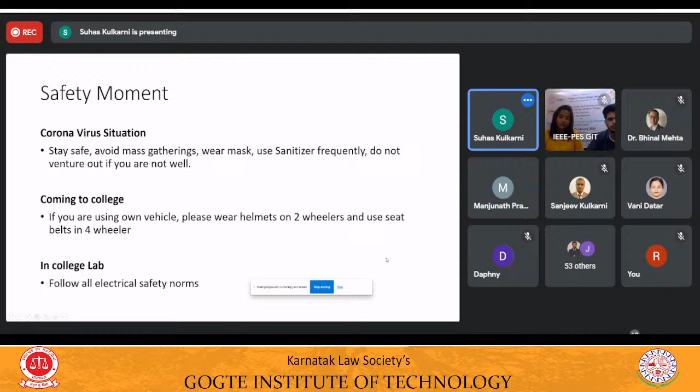So what I'm going to cover today in this discussion: we will talk about what is an asset in industrial operations. We'll talk about that. Then, what is asset performance management? What is the big deal about this? Why are we talking about all this? Some of the figures that you're going to look at.

I'm audible, right? I hope. Yes sir, you're audible. Okay, sorry, I'll keep checking in between because sometimes it so happens that you are lost and then you keep talking.

Okay, thanks. So then we talk about the different operations and maintenance strategies currently followed for assets. We'll try to compare with how we generally do car maintenance, kind of doing an analogy so you understand what these are.

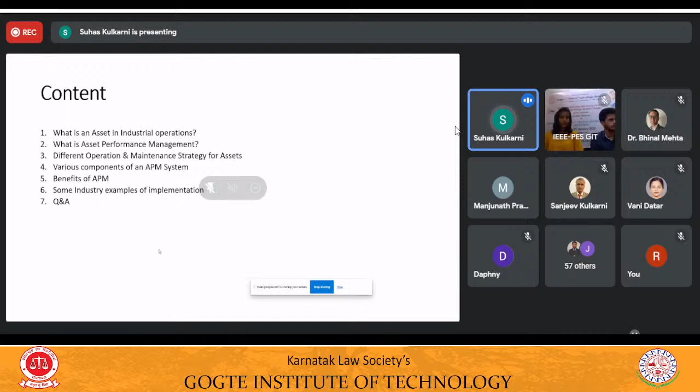Then we talk about some things - I'm not going to talk in depth about every component of performance management, but we'll discuss a couple of things. One is condition based monitoring - how do you look at the condition of a particular equipment, and based on that decide when you should take it for maintenance and do the related activities.

Second could be predictive maintenance. Of course it partly derives from the condition, but it also uses the models we're talking about. A lot of things don't work with standard physics-based rules - a standard physics-based rule would say okay, this happens and this happens, very logical. But today, with so much data available to us, and the computational power we've got, we found that a lot of seemingly unrelated data are actually related.

When you use artificial intelligence or machine learning models for this, you're able to connect a lot of data and derive meaningful insight out of it, and that actually helps predict when failure can happen. Based on multiple instances, you are able to teach the models - okay, when it last failed, this is what happened. Obviously, when we talk about a motor, there is a bearing failure, or vibration is increased.

It's a very clear case that the bearing is not right, so time to change the bearing. But that's something that can be easily inferred. Some things, when you're looking at complex systems, could just be a small blockage in the air pressure filter of a system, and that could lead to multiple actions, and over a period of time it fails. So when is the right time where you're able to identify what has really gone wrong, and what could really go wrong?

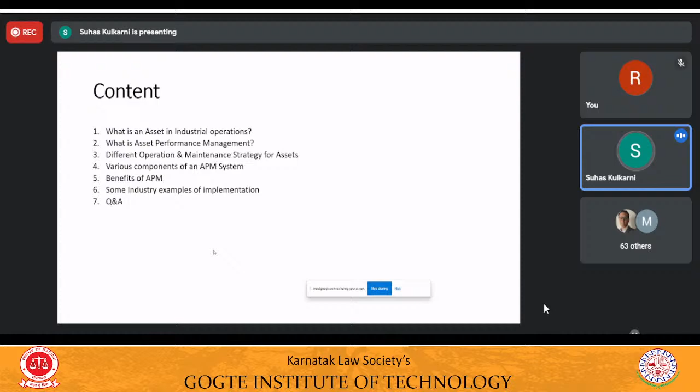Let's try to understand what's an asset. Now what's an asset? An asset is something that's of value that can be converted into cash, and that is what typically, if you go to a bank, they talk about assets like that. Whatever can be monetized becomes an asset. So everybody owns assets — some of us have a car, a bike, a house, or land. Everything is an asset, and all this can be converted into cash. So that is what we talk about.

But for a company, of course, it also has assets like this. A company will have a building, cash, equipment, and all those things. So primarily we could divide them into three types: one is physical, that which can be seen physically; second is human assets, the people that are around — people are assets; and then the third could be virtual, one that is not seen or felt, like IP rights — intellectual property and those things become the virtual asset. So that is what an asset actually is.

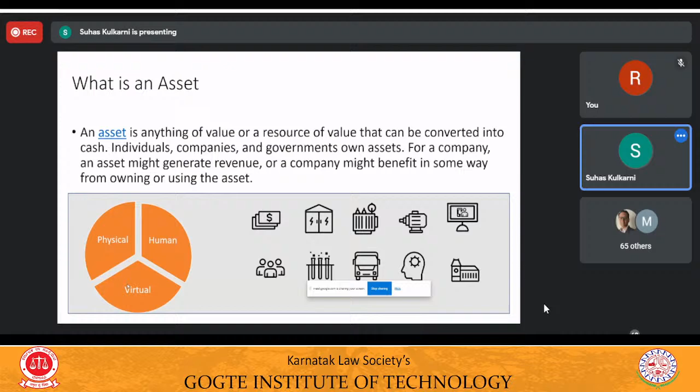Now what is of interest to us when we talk about asset performance management is — before that — especially when I talk about an asset used for production, what's the typical life cycle of an asset? Let's say you want a motor for a hoist, so you plan — you need a hoist, you have a hoist application, and the hoist will be run. A prime mover for the hoist will be a motor, so you plan for it, design the hoist, design the motor, and then go on to procure — who are the vendors who supply the hoist — and you procure, then install it, then commission. Once the hoist is commissioned, it's up and running, then you run, operate, perform, monitor.

Over a period of time, you feel, no, this isn't enough. You started with, just as an example, a DOL, direct online starting, and then you realize, no, this is not good.

I need better control, better energy efficiency, so why don't I apply a drive for it? You modify, you put an AC or DC drive onto it to make it more smooth, energy efficient, and all that. Then you run it for whatever time you need. Tomorrow there is a life for that, and when that life gets over, you discard it - either you replace it by disposing it off, or you decommission it and remove it from service. So that is how typically an asset life cycle works.

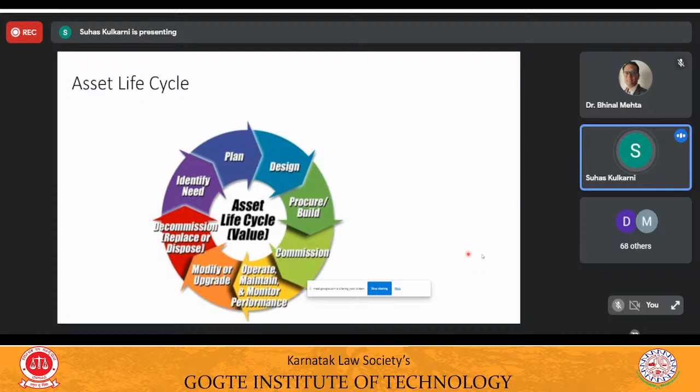But then we have the electrical, the rotary ones. The rotary ones are something that move a lot, and they are really prone to failure. These become utmost important, because once anything is moving over a period of time, there is going to be wear and tear, and when there is wear and tear, there is going to be a failure at some point of time, and so then they need maintenance. That is the rotary part of it.

Then we have electrical assets, which again could be, some of them could be rotary. If you look at the electric generator in this case, or there are switch gears and circuit breakers that will also have some moving parts and all that. But by and large, most of them are static. But again, because of the current, heat, and all those things, there are failures on account of that. So exposure to the load cycle, how it's loaded when going to the peak and all that - that's what causes the failure of some of the electrical equipment.

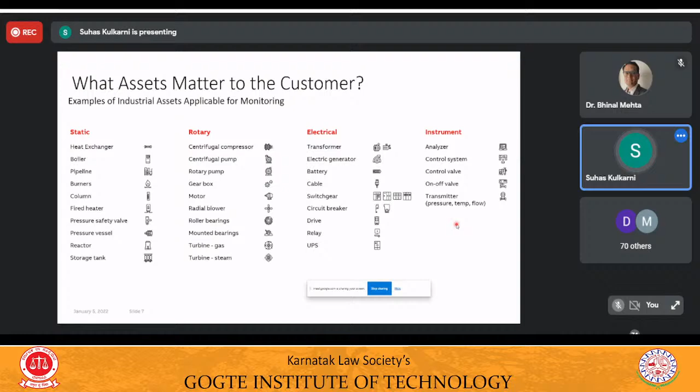That means any equipment that we were talking about in the previous screens should be working reliably. That means, let's say a transformer has to deliver, is rated for a particular kVA, and it should be working in that range. So it should be working in the rated range reliably. You should not have dips, it should not overheat, it should not fail, it should not have a shutdown. That is what is reliability.

Then the second part is availability. That means, as I said, many of these equipment need to be working 24/7, so they have to also be available 24/7. You can't switch it on and switch it off and then use it as and when you need. These equipment should be working reliably, and their availability should be very high. That is what is asset performance.

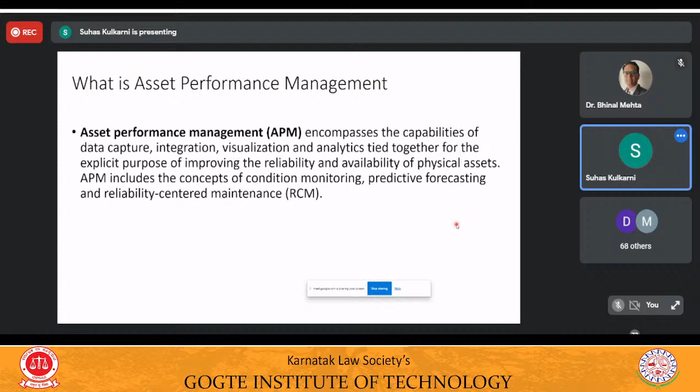Similarly, predictive forecasting is looking again at the conditions, modeling it, and then trying to forecast based on the multiple inputs that are there around it. We're able to forecast when the equipment can fail and what's the optimal time to get that repaired, so that you prolong it and don't need to do maintenance every now and then, because in that process you actually increase the cost. So we will look at some of the maintenance practices so that you will appreciate what I'm talking about.

Okay, so you see these figures, and this is talking about an oil and gas customer. In this case, 70% of the decisions, they are not aware when exactly it is due for maintenance. That means I just take a gut feeling and say, okay, I've run the motor for, maybe giving a number, 100 hours, so X number of hours, and I need to take it for maintenance. Is that the right time? Because the moment you take it for maintenance, especially motors and transformers, you need to shut it down, and the production is down, right?

So is that the right time? Could this be prolonged? Let's say, as per the running rate, it comes to a peak time, just before Diwali, when you have huge demand for your products, and then it comes for maintenance just before that. That would mean you would not be able to do your Diwali deliveries. So could I make sure, by any means, that no, I don't need maintenance right now? I can take it during Diwali, when production is relatively less and everybody is on holiday. I've already produced and sent, and that's the time I could do it. Can I prolong my maintenance, because as per theory it is due now? That is what asset performance helps you do.

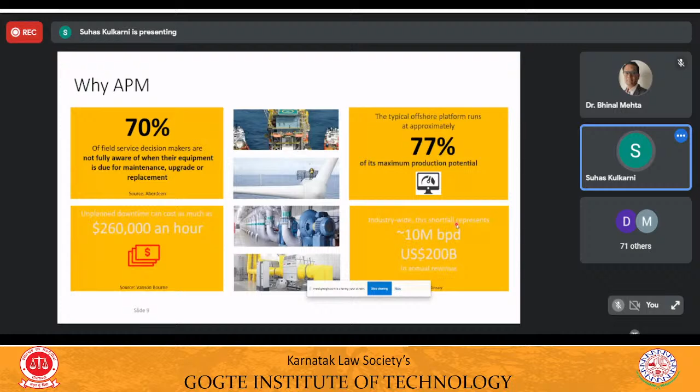What are the challenges or the market drivers that are there? One is today we are having less and less resources. Especially in a country like India, there's a lot of experience that is not there. People have retired. Younger generation does not want to do the maintenance kind of jobs. So we're having really unskilled people working in that particular sector.

Then there is market pressure for higher production and all that. Then there is margin pressure that I was talking about, where we need to make more and more out of less and less. Then there are old equipment - equipment that has got old, but I don't have money, and neither the time nor the resource to replace it. So that's another part. So what do I do then?

I look at enhancing the life of a particular equipment. That is where assets are becoming very complex today, because today's assets are becoming much smarter. They are able to give a lot of information about themselves. So that also helps in making the most out of the information that is coming out of these things.

These are things that are really challenging us, and as one of the surveys shows, we can definitely increase - companies are losing production because of unplanned downtime. And that's huge, right? If you're losing 5% of your production time because of unplanned downtime, and if you are able to set right even 50% of it, you're straight away increasing your profitability by 2.5-3%.

Okay, let's get a little bit more technical now as to how actually this is - is it clear, or is it too small for you to look at the screen? A bit small, sir, but we can see, sir. It's visible. Okay, right.

Generally, if you look at how traditionally people have been maintaining - if you look long time back before processes were set, it was a very reactive kind of thing: see something fails, you go and fix it. That's what we do in your house, right? You don't replace a bulb before it goes off. When the bulb fuses or it does not work, you find a new bulb and fix it. That is typically what is done, and it's not that important - you can always live without light for a couple of hours, and then bring a new one and fix it. That's what we call reactive maintenance.

Now, there is something that could be called preventive maintenance. What do you do? You do it before anything else has happened. Like changing the engine oil of your vehicle - after you run a couple of hundreds or thousands of kilometers, you go to a mechanic and say, sir, this has now been running for this, so you better change it. So that will ensure the engine remains healthy. So that's preventive maintenance.

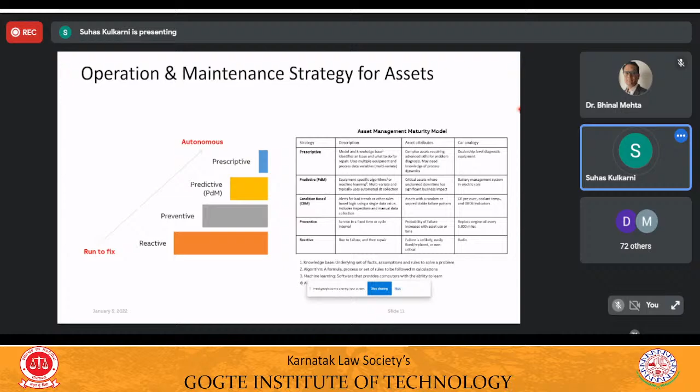Great, sir. Yeah, thanks. So, okay, so now we look at what is condition-based maintenance. Now I just put across some of the curves. You can look at this, this is the maintenance based on the asset condition. The asset condition is monitored. Now, how do you monitor the asset condition?

Asset conditions can be monitored using multiple sensors. Now you have smart sensors today available, I'm going to talk about some of them. One typical use case I will look at is how we do predictive maintenance for a generator, how it is done, what are the various steps and all that, and that's what you will look at in the subsequent presentation.

So there are these sensors which tell you a lot about what's happening to the machine and about the condition of the machine, and based on that, with certain logic and models, you are able to tell, yes, this is where it is. And if you look at the costs initially, if you do a planned maintenance, the costs are very high.

Because the costs are high, the repair costs are low. The red one, if you see here, are low when you are doing it in a planned way, because the machine is fine. But look at the prevention cost, it's very high, because you're taking a downtime of the particular equipment. Your production is stopped here in this case. So if you add the production value, that is where the cost is really very high.

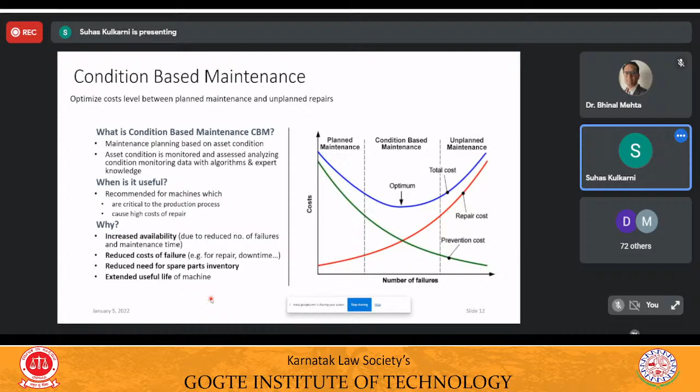Now, when can failures be detected or predicted? If you look at the condition of a particular machine, some of the signs can be seen as early as one year before failure, because you can know that certain things have changed. Many of these are rotating machines, and we're able to get a lot of information.

Let's look at the bearing. What happens when the bearing wears out, or starts wearing out? It's not completely worn out, but starts wearing out, and your vibration on the axial axis will increase. So you can see axial vibration coming up because of this, and you can detect that. That's when something is going to happen. As the wear increases, your vibrations keep increasing, and at some point it is going to fail. Now, when should you do this kind of maintenance?

This is what you do: a prediction of the failure. Based on the models, and if instrumentation is available, we can create a digital twin of the particular asset to really know the condition, and then find out when I could do the maintenance, probably when the cost is less. That is what will be determined by the customer or the production in-charge, because he or she knows when is the right time, the lean period, to take a shutdown and do this kind of maintenance.

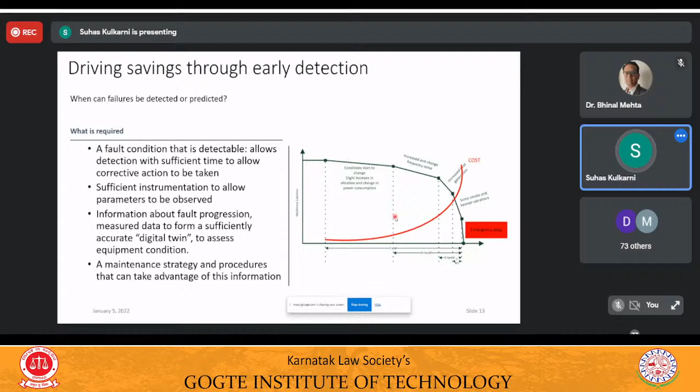So you understand how condition-based monitoring is helping us take advantage of extending the life cycle of an asset. So how does this work actually? Condition monitoring for an electrical equipment.

Let's look at an electrical equipment. A motor will have, as I said, a temperature - it could be a winding temperature, or a bearing temperature. It could be a vibration sensor near the bearings. It could be a current monitor to measure the harmonics and all that. Or it could be a moisture sensor - moisture can be a big hazard in industry.

So if you have moisture sensors, all these signals are able to tell you - just a minute - okay, so these sensors are able to tell you what is the actual condition of the equipment.

Now, then you build monitors - you build a kind of model that's going to realize what is happening to the conditions, which actually estimates what is happening. So in the software, or the system we're talking about in asset performance management, it takes the signals, analyzes them, runs a model, and then gives the actual condition. Once the condition is given, it's up to the operations or maintenance in-charge to decide what would be the right time to do this.

So how is it typically done? I'm just putting a very broad architecture what you can look at here.

Okay, so today if you look at multiple equipment that are there in the field, it could be a drive, a motor control, transformers, and all these things, so they are all connected, and all the information is coming to the asset performance management platform. This is a software platform which uses technologies like IoT to get data into this, and then each of these is modeled.

Each equipment that is giving information has a model, very similar to a digital twin, and there you have the inferences from the multiple inputs that you got to decide what's happening to the particular equipment, when does it need maintenance and all that.

The cloud computing gives a lot of flexibility in terms of the models that could be developed. So there could be a lot of models already developed for various equipment, and today you may have only X number of equipment, and tomorrow you add a different Y equipment or a Z equipment into this, and all you need to do is go to the cloud, look at what is the model available in the library for the new equipment added, just add it, and then you have a platform giving all the information to a maintenance manager to take informed decisions on when to really take an equipment for maintenance, what's the condition, what needs to be done, and all that.

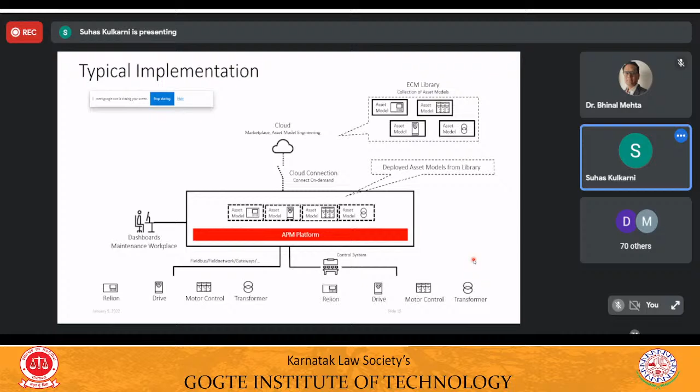Okay, so now let's look at predictive maintenance. Okay, so mainly it's what we talk about.

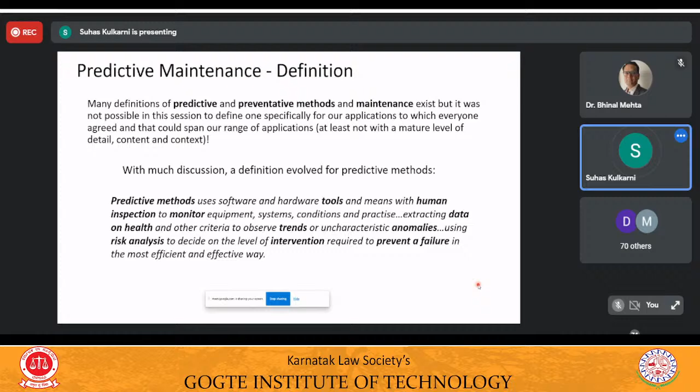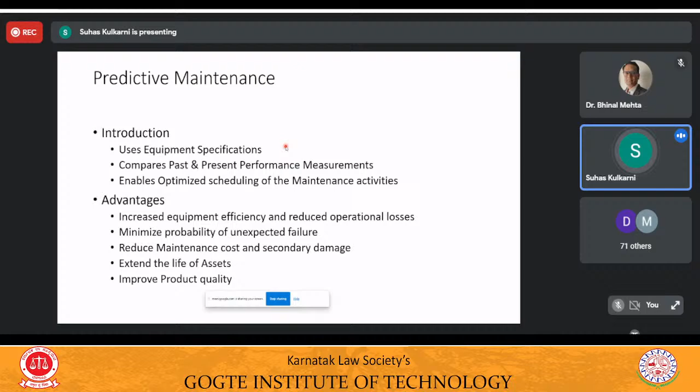So that makes it very important that we are able to really use predictive maintenance to the maximum. This also improves things because you are maintaining well ahead of time. It also helps you extend the life of the assets, and because you are able to run it in a much better way, you are also improving the overall product quality. So these are some of the advantages that come out of going for predictive maintenance.

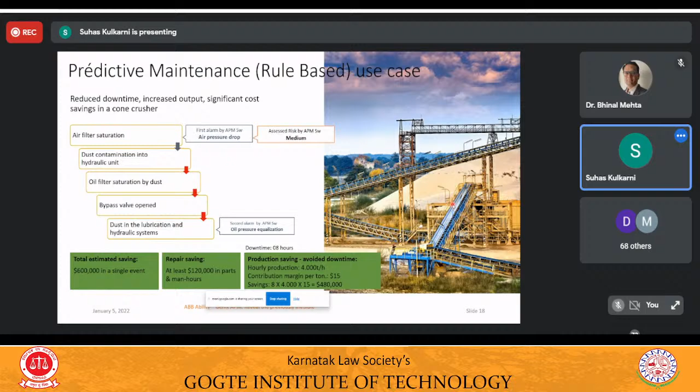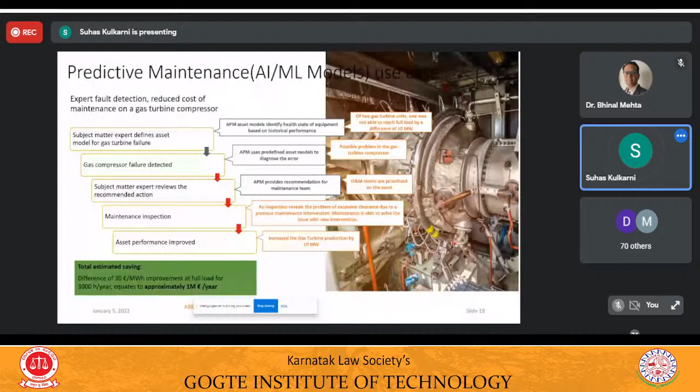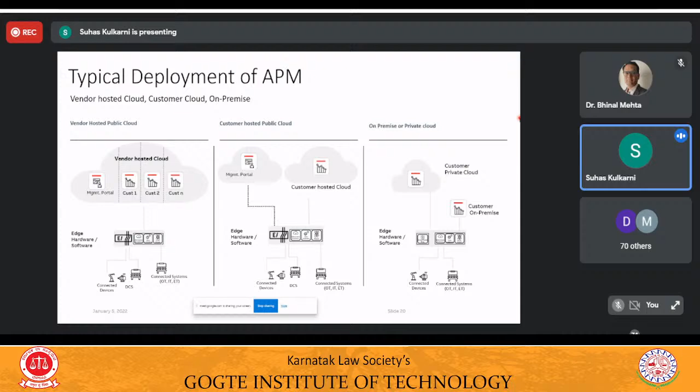Now, how is this? As I said, we are doing this for multiple customers. How is it impacting them?

So we've done the project for an oil and gas major where the real-time data is available on ABB Cloud. This is what I was talking about, and we are giving them inferences on their platform as to what is happening and what they need to do, which is helping them extend their asset lifetime and increase their operational capacity.

Similarly, we are doing it for another energy major, and we are giving them data that is enabling them to take operational decisions. We're doing it for a gas distribution agency on how the data is moving. We're doing it for a water distribution company, again with data coming onto their cloud or our cloud, and we're able to tell where the leakages are, what they need to do, and how overall their energy efficiency can be increased, and so on.

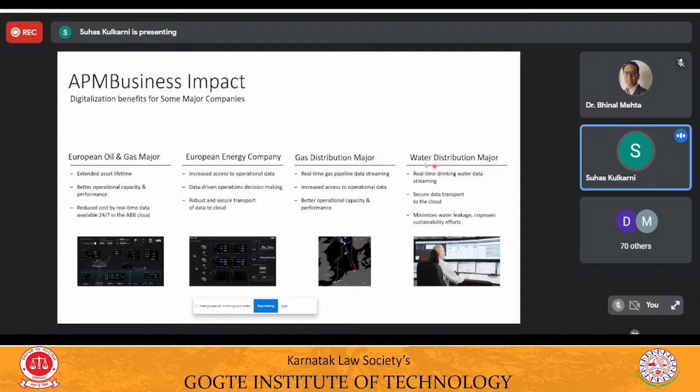So these are okay. Now, as I said, we will briefly look at how we typically carry out predictive maintenance of a generator. This is an ABB example with some of the ABB products and solutions. I have not named any of them explicitly, but this could vary a little from company to company. So what I have done is based on what I have seen, please be aware of that. In case you find it a little different, this could be an architectural or philosophy difference between the various companies, because there are similar companies to ABB who offer different solutions.

But I have tried to make it very general. Please forgive me if you find it very specific and different from what you've heard elsewhere, that could be a difference in architecture. Okay, so let's look at a particular generator.

So why do we need an optimized maintenance plan? As I said, you need an optimized plan because you want to take maintenance when it is really required. And how can you give an optimized maintenance plan? It could be by physical inspection, which includes an air gap inspection - the air gap between the stator and the rotor, that could be looked at.

MACHsense is a smart sensor by ABB, and it can sense a lot of information about the motor and its condition. We will see that in the subsequent slides. Then we can do a life expectancy analysis of the particular motor - how long it can run, what condition it's in - and do an actual survey of the site, then discuss with the customer on the maintenance schedule and how it is going to work.

All these put together, we can really come up with a maintenance plan wherein the customer can extend the maintenance period, or rather delay the maintenance, to get the maximum out of the machine and have the minimum cost of maintenance.

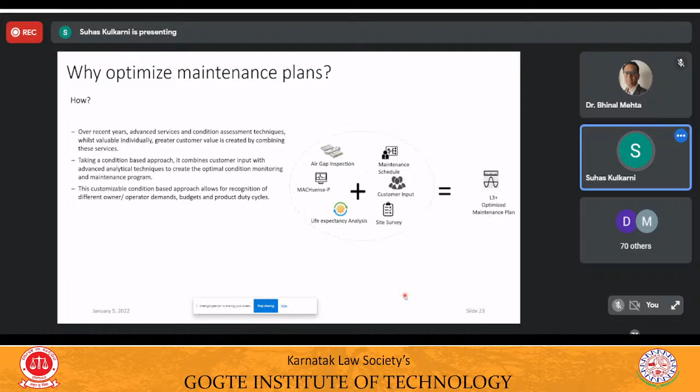So we use the condition-based approach, and we use both non-invasive monitoring process. That means we really don't need to take out anything, but at some point of time, for some of these things, we could also need some invasive method. But again, these are all minimal invasive methods, so you really don't need to take out the whole motor and then do the inspection, but it could be something that needs to be done.

So again, finally, the idea is to increase the availability, bring down the risks of any unplanned shutdowns and unexpected failures, and maximize the uptime, ensuring that the maintenance planning is done properly.

One is, we could delay, but then if that leads to unreliable operation, that is also not something we want. So it has to be reliable, and it has to be also prolonged. So that is where we are kind of working on an optimized maintenance plan.

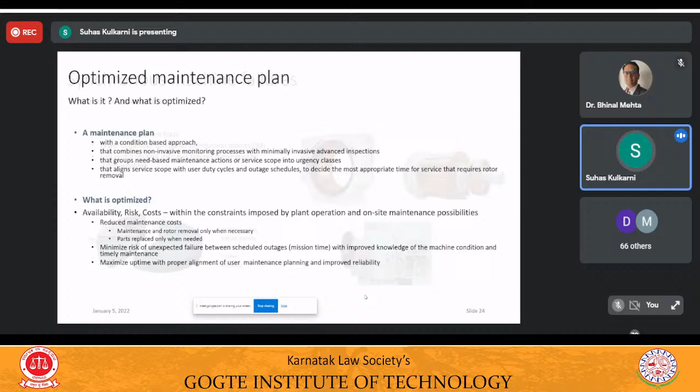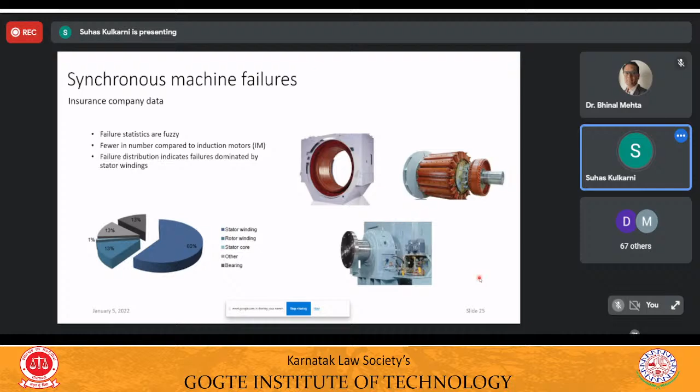Now, what are the root causes for the generator stator failure? Again, the biggest root cause is where the electrical insulation actually fails. And sometimes it's a mechanical failure, sometimes it could be thermal, and sometimes it could be bearing failure. But majority of the time, it is the electrical insulation. Now, why does the electrical insulation fail?

Again, if you look at that, it's the aging. It has aged, gone through multiple cycles of heating, cooling, and all that, and it's been used for quite some time. That could be one reason, or it could be contamination, internal partial discharges, loosening, thermal cycling or overloading, or defective corona protecting. So these are some of the major causes for insulation failure in a particular machine.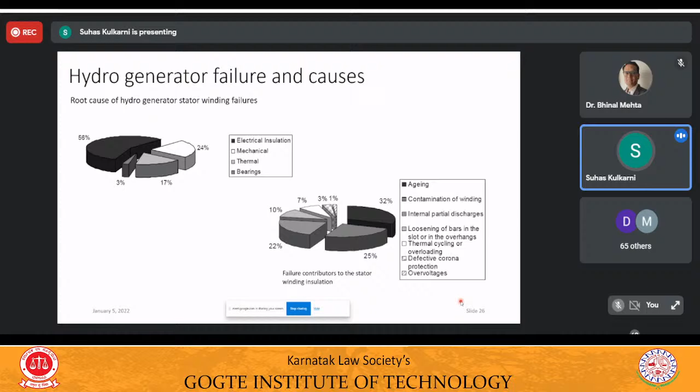So this is how we arrive at how and what is really happening, and then we work on that, and then we do a life expectancy analysis — why is the most critical failure, what is the condition assessment, what is the expected lifetime, what are the recommendations for maintenance action. So all these are presented to the customer, and how the downtime can be reduced.

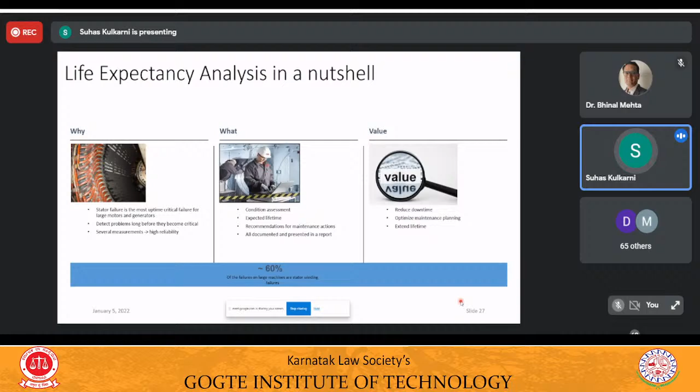So, as I said, using the smart sensors, we are able to get a lot of things — one is the load, torque, temperature, FEM model for fault detection, flux force, speed, torque — all these are captured by the smart sensor, and it's available through our own dedicated software, and these are available for everyone.

So today's world, almost all vendors have got this kind of thing that are used for defect detection, and are able to give what's happening — whether it's an interturn defect, or rectifier defect in case of rotors, or sleeve bearings if there is excessive or unequal clearance.

Similarly, in case of stator, is it the core looseness, or the supply quality? We also check the supply quality in terms of harmonic distortion, supply unbalance, over voltage, under voltage, or frequency changes, and all those things. So the smart sensor is able to give a lot of this information.

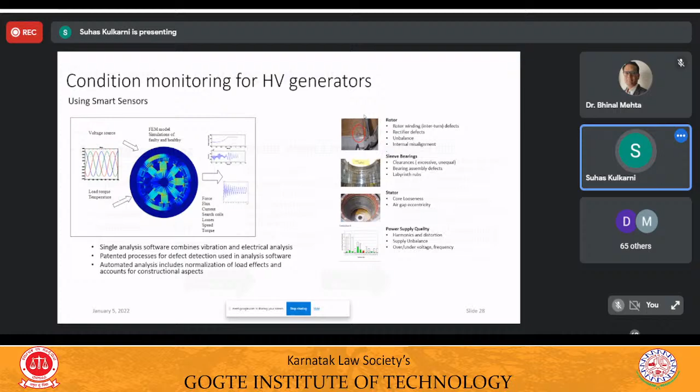So there are some things that you can do when the generator is running, and there are some things for which the generator needs to be stopped. And once we do this, then we are able to come up with an optimized plan.

So the smart sensor is able to get the data while the generator is operating. We could do operating data analysis in terms of the current, torque, and all those things — whatever, how the motor or generator is working. Then what has been the operations and maintenance history, and what could be the down impact on the business.

So all these can be done when the generator is operating. But some of those things, like looking at the rotor for life expectancy analysis and mechanical checks, require the generator to be stopped. Once we have this data from both steps, we can come up with an optimized plan for predictive maintenance of a particular machine, determining when and what is required, such as when rotor removal is needed.

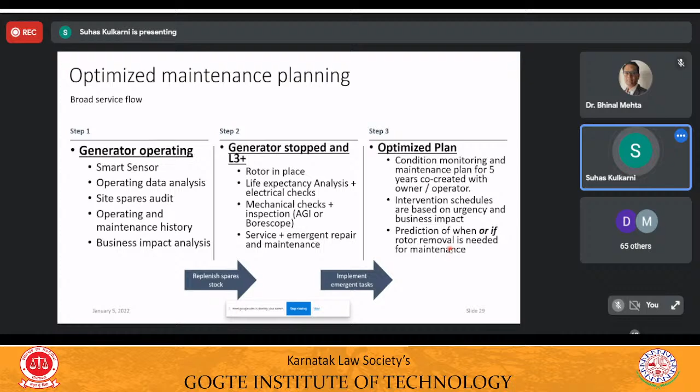So these are some things that come out of it in terms of the operating data, the bearing condition analysis, the electromagnetic defect analysis, or the power. All these reports come out based on the smart sensors and the inputs that are there.

So it's typically a motor analysis software with the smart sensor that is able to give you all these kinds of inputs, which help in taking decisions.

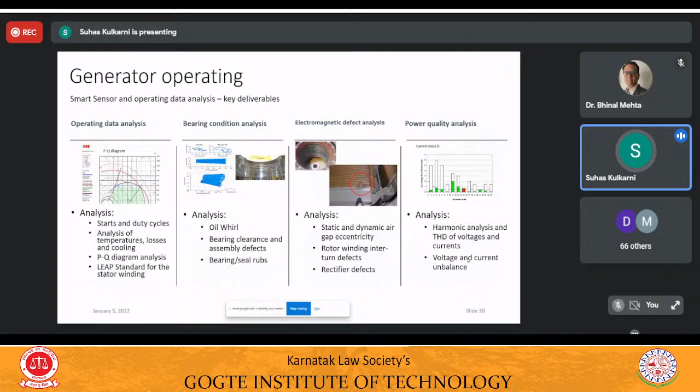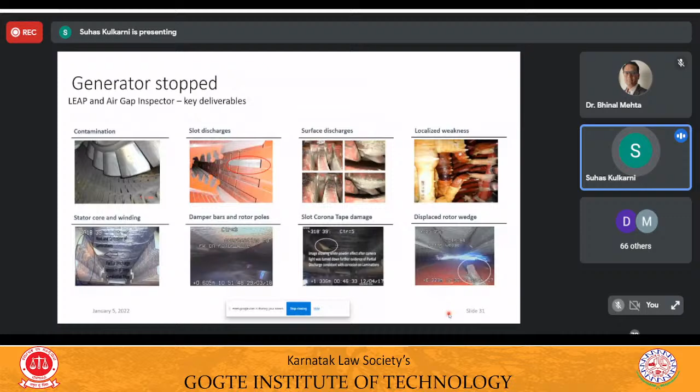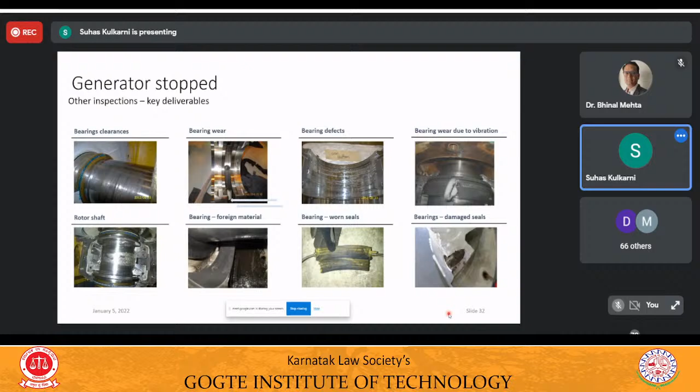Similarly, when the generator is stopped, you could look at contamination, slot discharges, surface discharges. These are all physical inspections that can be carried out, and then based on these two inputs, we come up with a plan.

Once we have these done, we determine a severity factor as to what could be the severity of the failure, and similarly what could be the serviceability, meaning how much time and what would be required - the MTTR, the mean time to repair. Once we have both these things, we really know what is the impact factor, which is severity versus serviceability, and that determines when a machine should actually be taken for maintenance.

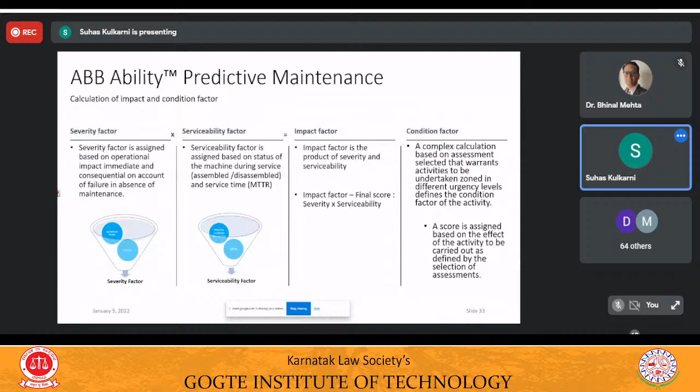Based on these things, we could then come up with what needs to be done immediately - this has to be attended to immediately - and something that could be done during the next 1 to 2 years, or what could be done in the next 2 to 3 years, and so on.

So this is typically how condition-based monitoring and predictive maintenance works. Using the condition-based data and analytics, we are able to give a predictive maintenance schedule for a particular machine, and this becomes very important for the end user to make sure the assets are used right. This is just an example, and the same principles and philosophy can be followed for any equipment - physical inspection, sensor-based inspection, and then determining what needs to be done and what can be done.

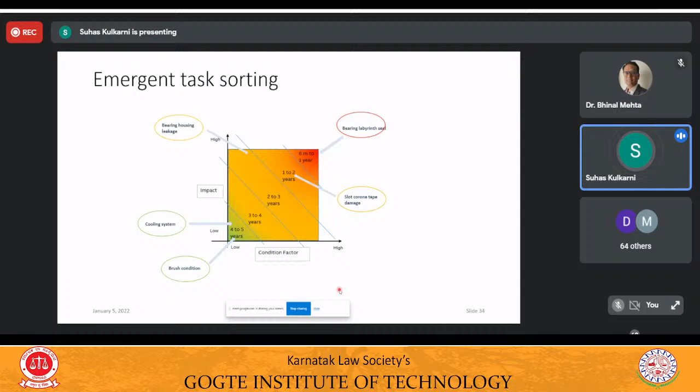So then we come up with indices showing the impact and condition factor. The highest one is something that needs immediate attention, like the stator end winding - there is erosion on that. Similarly, the rotor winding has something that needs to be done. So this is something that has to be handled.

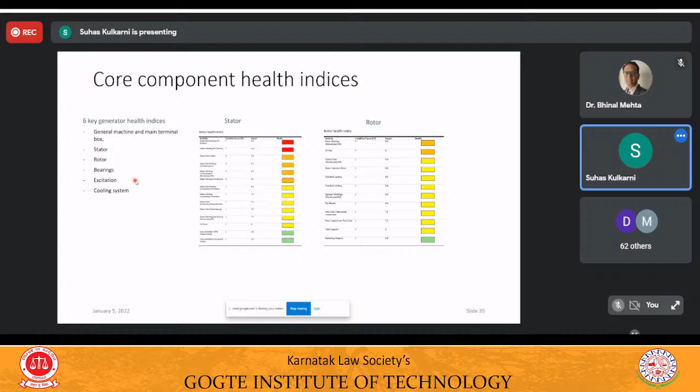Based on that, there is a maintenance schedule that could be drawn up - what needs to be done, when we need to run the sensors, and when we really need to carry out the maintenance activity for a particular generator.

So this was all about what assets are, what asset management is, what condition-based monitoring is, what predictive maintenance is, and how we do predictive maintenance for a particular piece of equipment - just to give you an idea of how it's done. So, all good as of now.

Yes, sir. Okay, good. Yeah, we are almost okay.

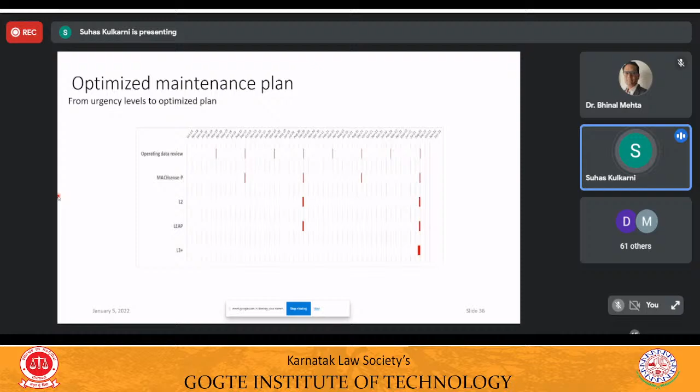Now I will talk about what we did at some customer places. As you see here, it's a sugar plant, and this needs to run continuously without failures. In this case, it's mainly the availability of the electrical system we were talking about, not the mechanical part. So we were collecting data from the relays, transformers, and voltage to predict failure.

With online condition monitoring for the breakers and switch gears for maintenance planning, and converting data into online dashboards like this, which shows what is critical and what isn't, an operations person is able to take informed decisions on it.

What resulted from doing this was at least two 4-hour electrical failures, which were happening prior to this, were avoided, resulting in $750,000 of savings, which in Indian rupees comes to about 6 crores - that's huge money. So 5 to 6 crores of rupees were saved. Maintenance costs of about 35 lakhs were also saved, and overall there was a 15% additional saving because of replacing equipment at the right time, not investing unnecessarily. That's how overall it resulted in savings.

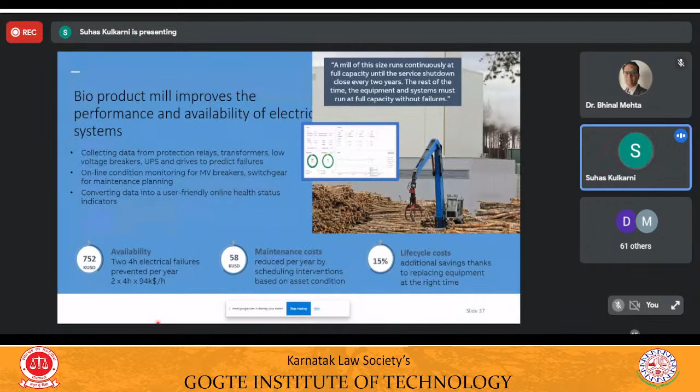Now we look at a particular mining customer. Mining is a big business actually, and here you can see the losses can go into multiples of multi-million dollars, unlike a sugar plant, which is small and not that critical. Mining produces almost 6,000 tons of iron ore every year using about 6,000 assets.

So we were monitoring all these assets and giving the asset health status as to what is the status of each equipment, whether it's red, green, or yellow - where maintenance needs to be carried out, where they really need to focus. All this really helped with early warnings, and 88 maintenance work orders were relieved for these 6,000 assets, resulting in savings of $5 million in terms of spare parts, material costs, and man hours.

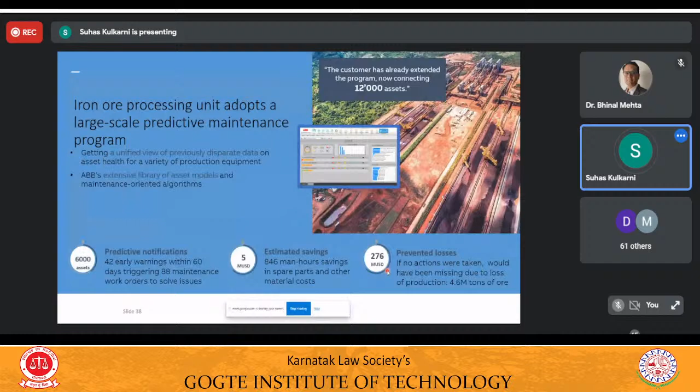And then, if there was a production loss, it could have caused 4.6 million tons of iron ore production loss. These are notional - this has not happened, but had any of these things happened, this is what would have been lost to the company. So this is another example of asset management in iron ore.

Now we look at hydro. This is a large hydropower company in Europe - can't name it. Even if it is named by mistake, please ignore it. I'm not sure, I tried to remove all the names.

But yeah, again, these are early warnings and overall performance improvement, with maintenance cost coming down by 2%. Overall, a 10% increase in performance, and early notifications for more than 600 assets. This is what we are able to do. This particular hydro company is tied up with us, and we are looking at a very big opportunity in the coming days with them to make sure all their assets are covered.

So what I want to say here is, this is what customers have started realizing. There is a lot of investment going into this, and this is really a very interesting field for young engineers to be in.

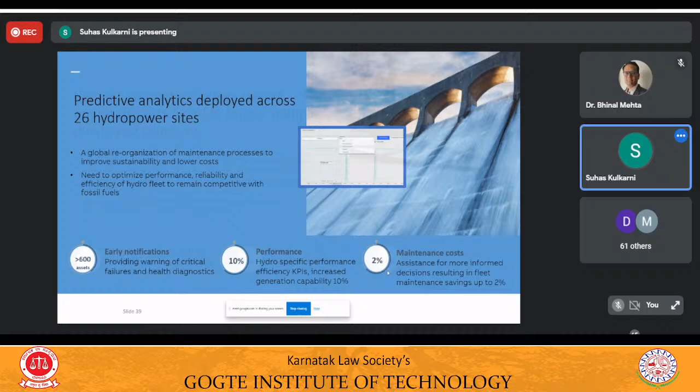Similarly, we had a cement customer where we could reduce their overall operating cost by about 3 to 5%. Here we not only have maintenance data coming in, but also a lot of group-wise integration of data, including data from their laboratory systems, ERP systems, and all that, to help really operate the plant at the optimal level. Aided with that was the predictive maintenance stuff. Overall, it increased very big savings for them.

If you look here, we are talking about a payback of less than a year for the kind of investment they are making. That's something great, right? You borrow money, put up a facility, and within that year you recover back whatever you invested, and the next year is all additional profits. So this is something that is interesting.

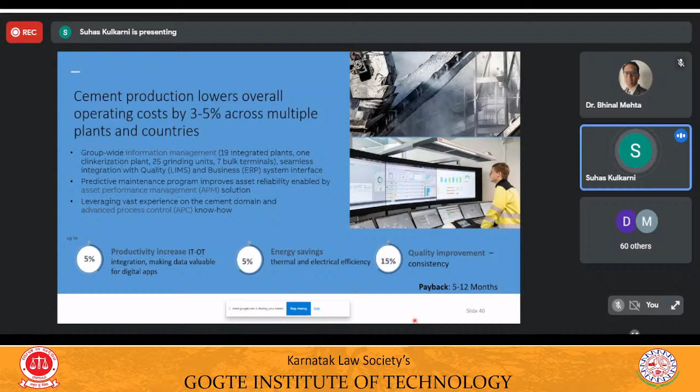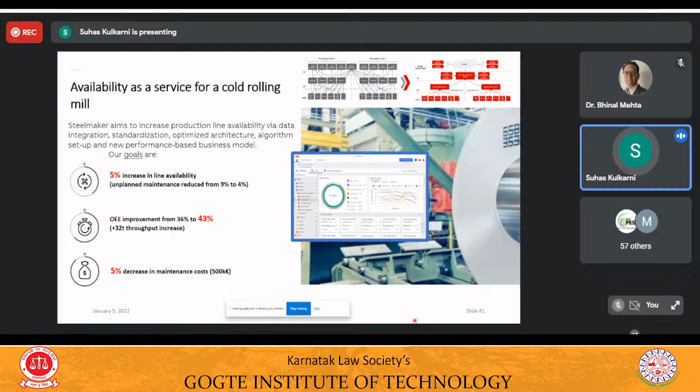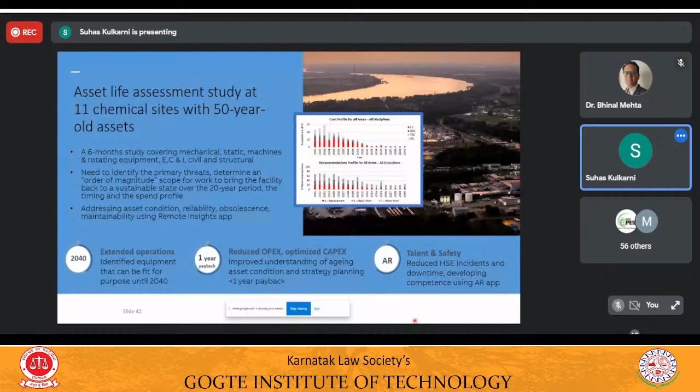I think I've spoken a lot right now. We have another 15-20 minutes. If you have any questions on this, please feel free to ask. I would be happy to talk about it, and I also have other collaterals. If there's something specific required, maybe I could speak about that.